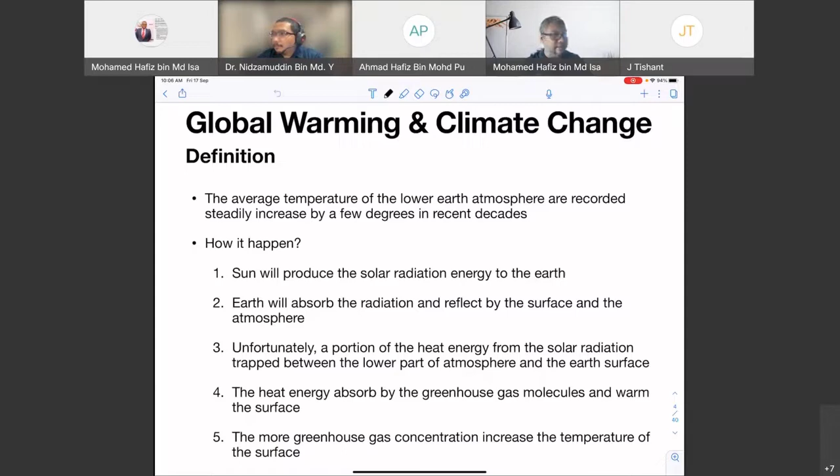So in order to reduce the Earth's average temperature, we need to reduce the greenhouse gas concentration. So what are the impacts if we have a steady increase of average temperature, or global warming?

There are many impacts that we can divide into a few sectors. For example, our health - there are many infectious diseases, poor air quality, respiratory illness. Agriculture yields have already changed, where we need to change our irrigation demand. Our forest composition is deteriorating, and we have a short supply of water resources. For example, some parts of the Earth are having drought, and some parts are being heavily flooded. We have coastal erosion, coral bleaching, and so on. These are the impacts of global warming and climate change.

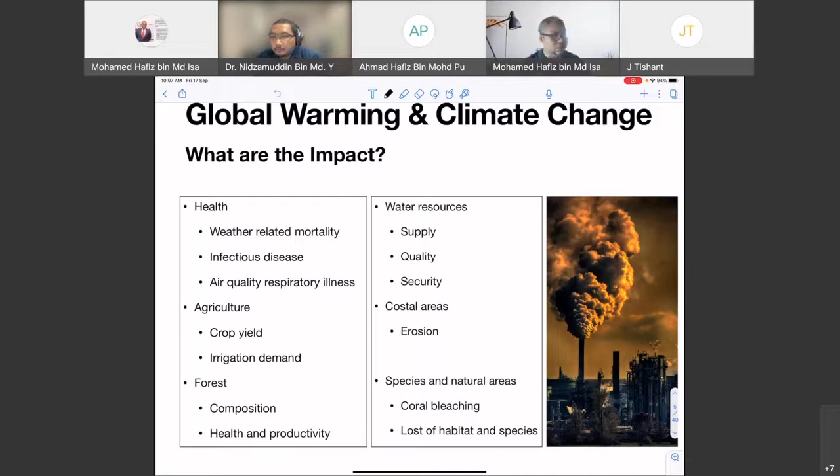So we have to reduce the impact. As just mentioned, the cause of global warming and climate change is due to the concentration of greenhouse gases. So what are the greenhouse gases? These are several gases categorized as greenhouse gases: carbon dioxide, methane, nitrous oxide, fluorinated gas, and other gases.

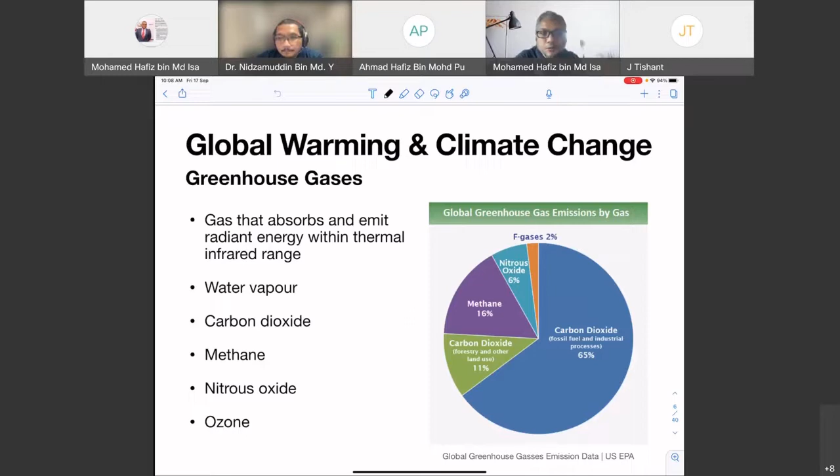So the majority of the gas is carbon dioxide, which is generated from fossil fuel combustion and industrial processes. In order to generate electricity, we need to consume fossil fuel, which generates carbon dioxide. So which sector produces the greenhouse gases?

We have the electricity and heat generation sector, and then industrial processes or manufacturing, construction, transportation, agriculture, and land use change and forestry. As we can see here, the biggest percentage of greenhouse gas production is coming from electricity and heat production, followed by agriculture, forestry, and other land use.

What does this percentage mean? Previously, we had forest, so when we want to do agriculture, we have to do land clearing and so on - that's why we have land use and change of land use. And then finally, we have industry, buildings, and transportation. So where we're going to do the energy management, of course, is in the industry and the buildings.

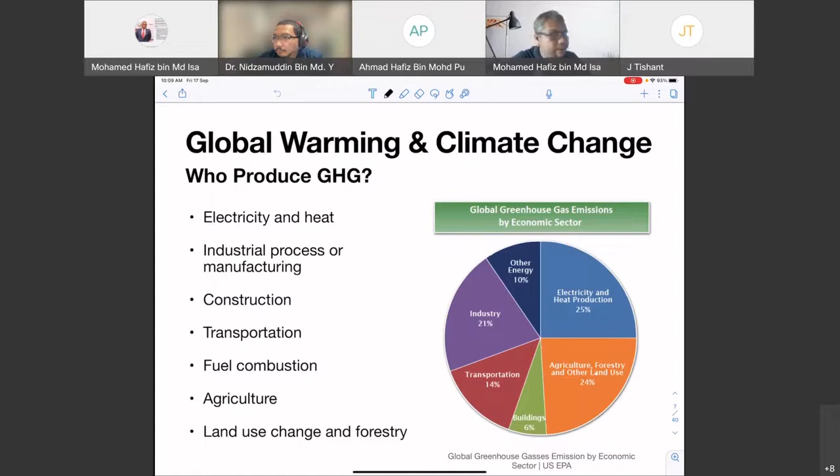Now we look at our country, Malaysia - also a similar trend. From 1980 until 2017, we have steadily increased the amount of fossil fuel, or the fuel source that generates electricity.

So we have the natural gas, petroleum product, coal, biodiesel, and electricity. If we are not doing something, we might have more fossil fuel being combusted, and therefore more greenhouse gases produced from our process.

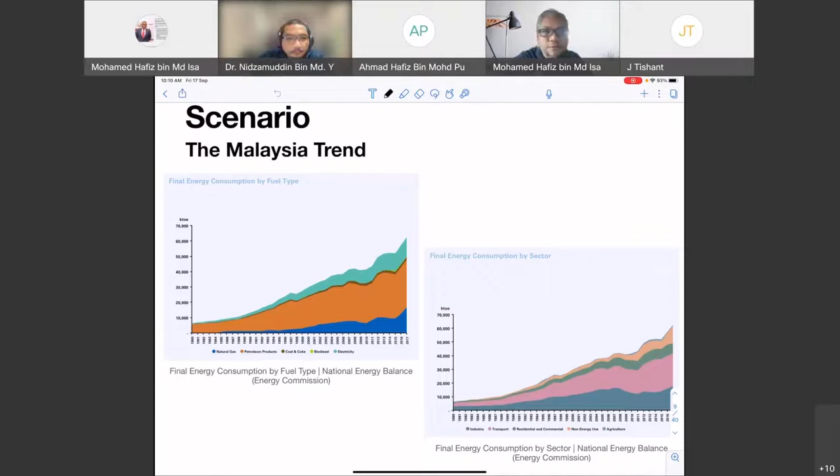So in doing so, we have a global target which is set by United Nations under the Sustainable Development Goals. There might be other objectives addressed by the United Nations to reduce the effect of energy use on greenhouse gases, but I will only focus on goal number 7, which says to ensure access to affordable, reliable, sustainable, and modern energy for all.

What are the issues? More than 1 billion people located in rural areas still live without the benefits of electricity, so we have to balance between generation and consumption. And about 3 billion people still lack access to clean and safe cooking fuels and technology. Without clean and safe fuel technology, of course it will result in malnutrition and so on.

However, while renewable energy power is rapidly increasing, comparable progress has not been seen in transportation and heating. We have seen many renewable power sources being used at the moment, for example solar photovoltaic, solar thermal, biomass, and so on. But this is not being seen in transportation, except for electric cars, and the heating process.

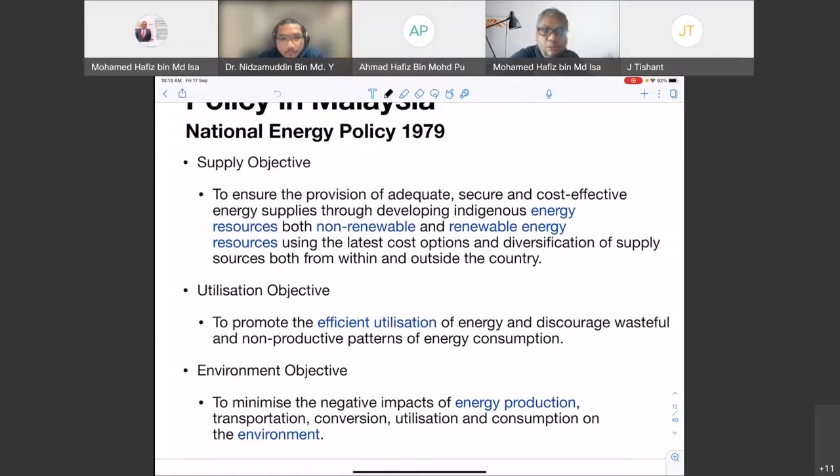So we focus on the second objective, the utilization objective, where we have to use energy efficiently. So we have the global policy and the national policy, which is the utilization objective. And then we have the green technology policy, which sets criteria for what green technology is.

The criteria are to minimize degradation to the environment, have zero or low greenhouse gas emissions, be safe for use and promote healthy and improved environment for all forms of life, conserve the use of energy and natural resources, and promote the use of renewable resources.

So the energy management system consists of this, because green technology is not only focused on the product and equipment, but also the system, and therefore the energy management system is categorized as a green technology.

Apart from our policy, we have a commitment we have to comply with: to reduce our greenhouse gas intensity compared to our GDP by 45% in 2030, with a baseline based on 2005, where 35% of this is on an unconditional basis and another 10% is upon receiving funds from developed countries. So we have to reduce our carbon emission intensity by 45% in 2030 compared to our baseline in 2005.

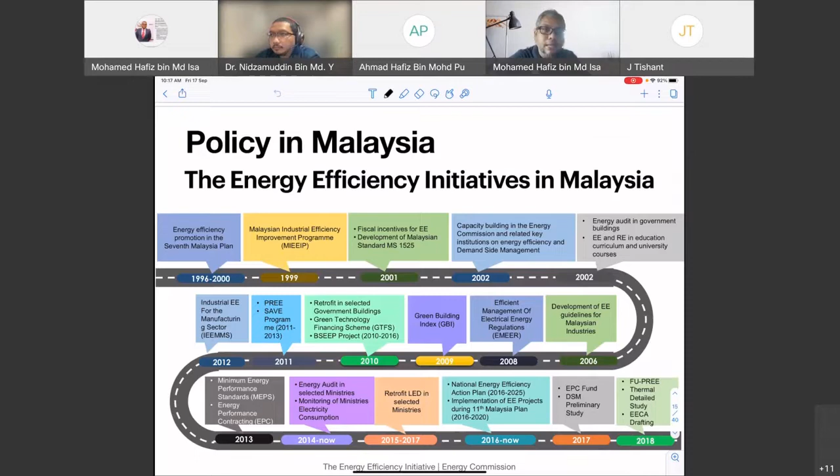Now we look into what is the energy management system or sustainable energy management system. The definition of the sustainable energy management system is a process of managing the energy consumption in the organization to assure that energy is efficiently consumed.

Now the interesting part is the second part, which covers the whole organization. It's not only focused on the equipment and machine, but also the operators who are going to operate the equipment. So the energy management system is not only focused on the equipment, such as when you change to the LED lighting system, or change to energy efficient chillers and so on.

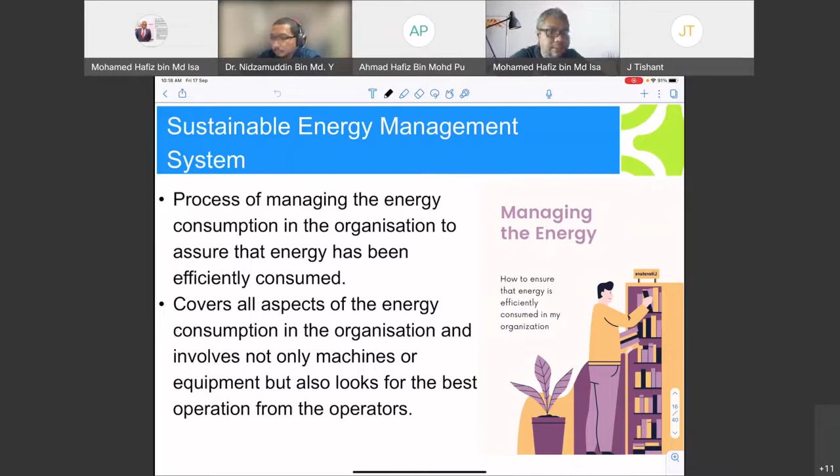It's also focused on how we're going to operate the equipment or the appliances in an efficient way, and what are the methods, what are the procedures that we need to adhere to.

So the objective of the energy management system is to reduce the energy requirement per unit of output. Let's say, for example, before we implement the energy management system, in order to produce 1 unit of product, we consume 100 kilowatt hour. After implementing the energy management system, we hope to reduce from 100 kilowatt hour to maybe 50 or 80 kilowatt hour per unit of product.

So then we convert the energy we consume into a cost. This is where the energy management system not only focuses on the technical part, but also the management part. Because our top management or our bosses do not care how much kilowatt hour we reduce, they only care about dollars and cents. So we have to convert how much energy we reduce into the total cost that we can reduce.

The third objective is to achieve and maintain the optimum energy procurement and utilization. So in doing the energy management system, we will look into what are the energy efficient equipment. In ISO, for example ISO 50001, for the energy management system, it requires the company to look into the design, into the purchasing, into the procurement process of buying efficient electrical appliances or energy consuming appliances. So in the energy management system, we will look into how we're going to use the system to procure energy efficient appliances.

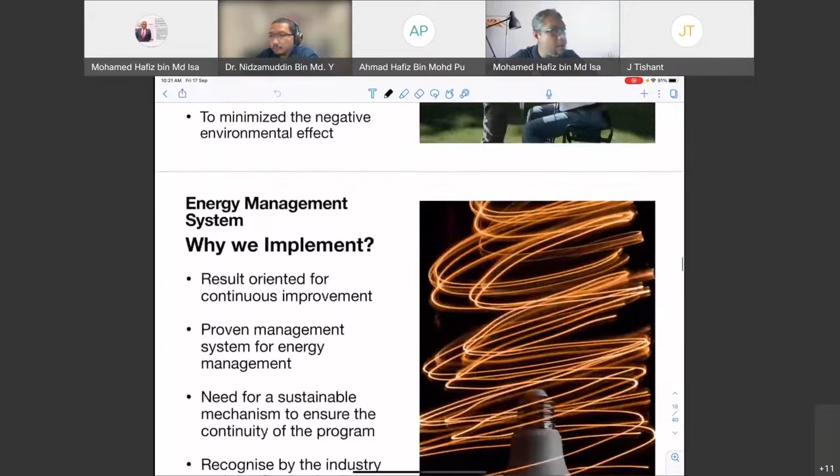And finally, to minimize the negative environmental impact. Because when we reduce the energy, we also reduce the amount of carbon emission that we emit from our plant or operation. So we are going to minimize the negative environmental effect, as the increase of greenhouse gases will lead to global warming and climate change.

And then, why do we need a system? Everybody can do the saving. Everybody can change the lighting system. Everybody can change the chiller system. Everybody can change to efficient motors. But why do we need a system? Because when we do not have a system, it is difficult for us to provide results, and difficult for us to do continuous improvement.

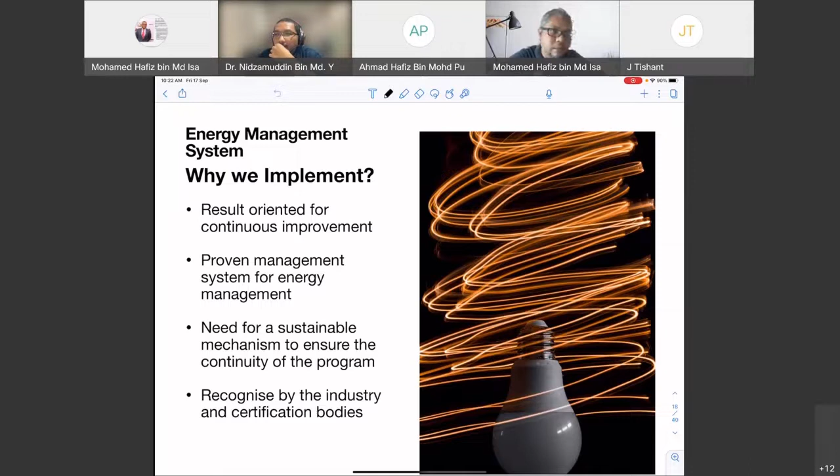So that's why we need a system that's going to guide us so that we have the result we need or target, and we can do continual improvement. Without a system, we cannot prove to our top management how much we save.

If we invest a certain amount of money, this is our return on investment, this is our simple payback period. That's why we need a management system to monitor, target, and plan. Without a system, it's difficult to achieve a sustainable output, so we need a system to have a sustainable energy management initiative. And finally, if we have a system and resources to be certified or recognized by an international body, then we can get a certification.

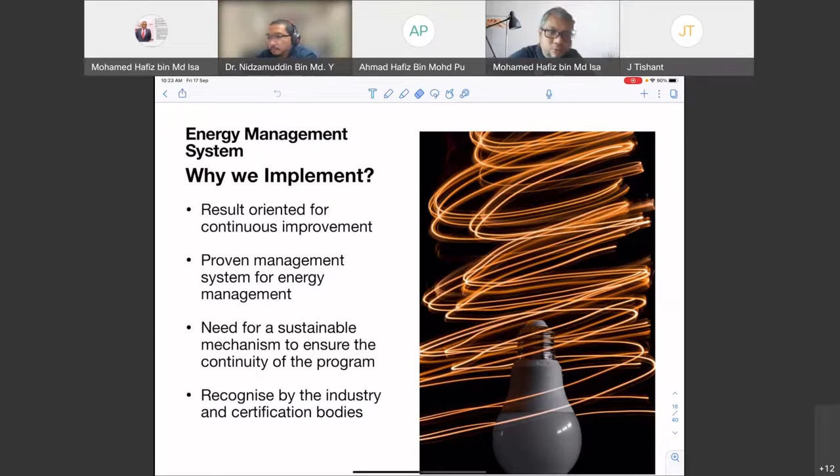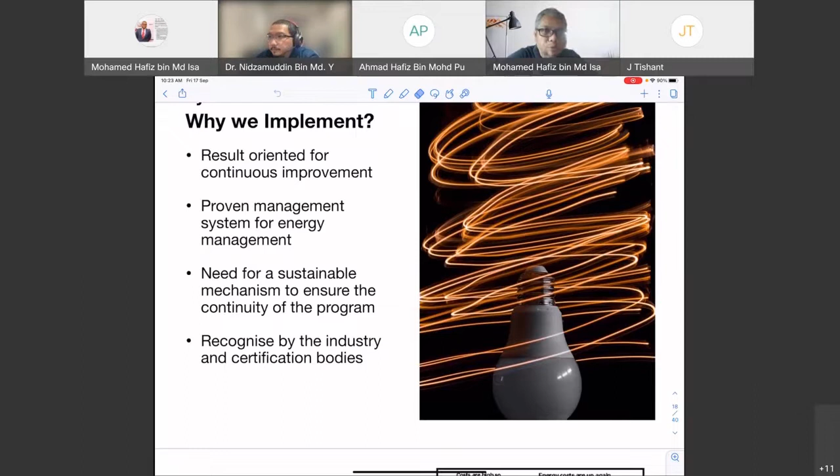In Malaysia, we have two kinds of certification for energy management: one introduced by MGTC under AEMAS, the ASEAN Energy Management Scheme, and the global certification, ISO 50001, which I'm going to explain in a few seconds.

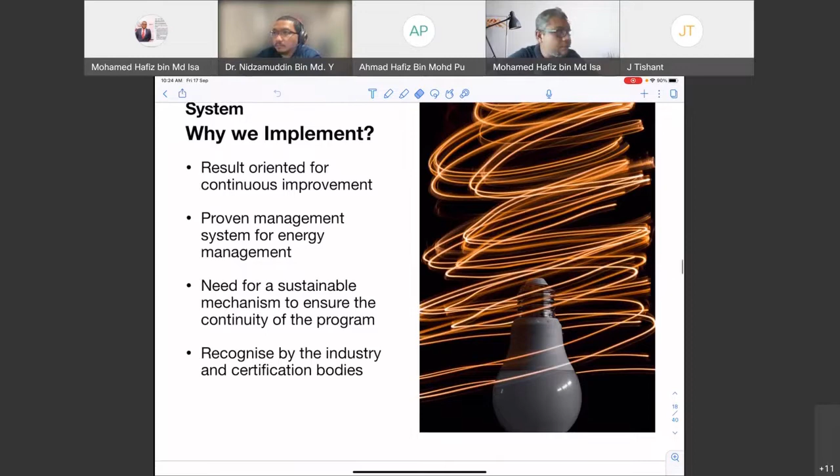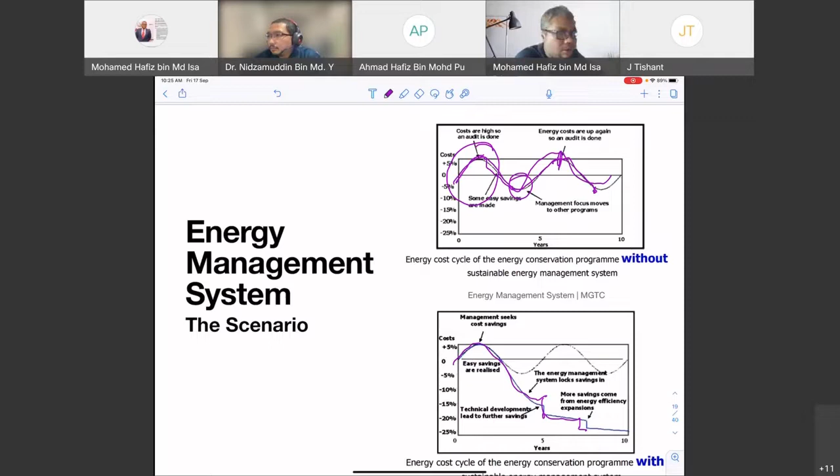However, if we have an energy management system, we start saving and always monitor, monitor. So we can have low, medium, and high investment costs to achieve our target.

So like I mentioned before, we have the ASEAN Energy Management Scheme, introduced by ASEAN and promoted by Malaysia Green Tech. It's called AEMAS, Energy Management Gold Standard, with 3 levels of certification: 1 star, 2 star, and 3 star.

First, the 1 star is where you develop the energy management. The components you must have for this certification are the energy policy committee and the energy management component, and you conduct the awareness training, then you get the 1 star.

For the 2nd star, you have to conduct a detailed energy audit and achieve about 5% savings. Then you get the 2 star energy management gold standard certification.

Finally, for the 3 star energy management gold standard, you have to integrate with other management systems, for example safety and health, environmental management, or product quality management systems. So to have a 3 star, you need to integrate with the existing management system.

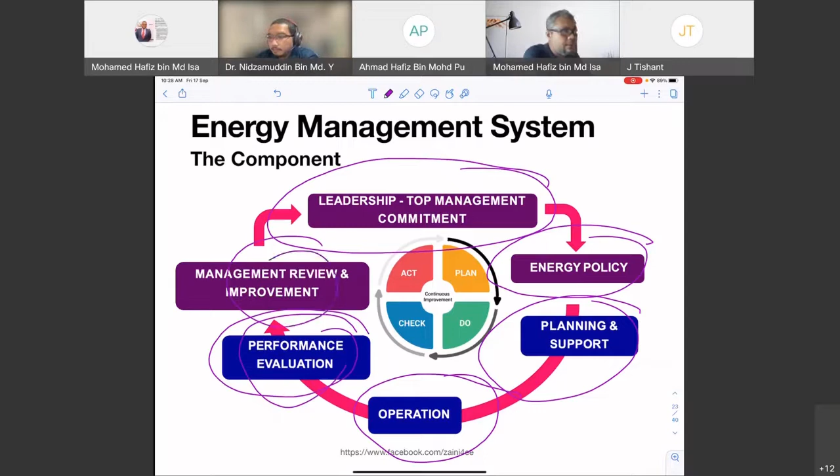First, we have leadership at the top, the top management commitment, translated into the energy policy. Then we have planning: how to set a baseline, what the targets are, what we're going to do. Then we do operation and maintenance of equipment and procedures, and then performance evaluation and management review. So it's a cycle of plan, do, check, and action.

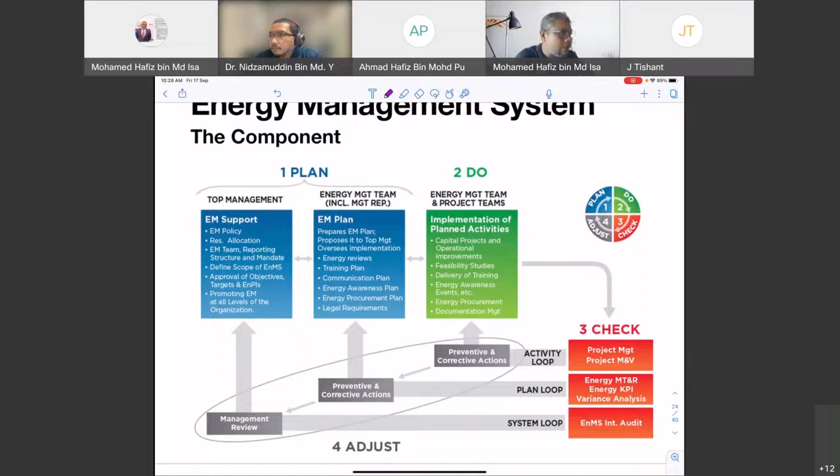So what are the components? Almost the same: we have the energy policy, energy team, energy report, energy target and plan, communication plan, training plan, awareness, legal requirement, procurement, and training—resources to support the implementation of the energy management system. Basically, the two systems are the same.

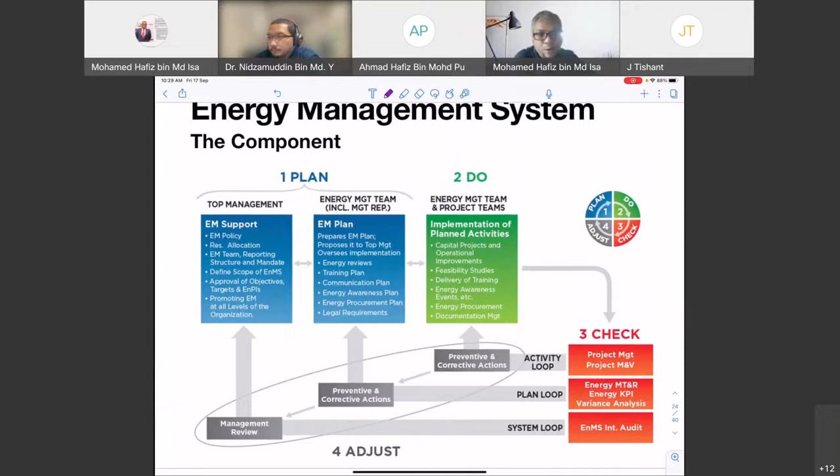However, the ASEAN Energy Management Scheme is recognized only for ASEAN countries, but ISO 50001 is globally recognized. But for ISO 50001, there is no 1 star, 2 star, or 3 star. It's just that you have a certification or not.

Right? But we need to do the system. We need to do the management. We need to do the energy management systematically. So we have a system. All right, so what are the success factors of doing the energy management system?

First of all, in any energy management or management system, we need to have commitment from our top management. Without their blessing, without their commitment, it is almost difficult for us to implement the energy management or any management system. So we must have a top to bottom hierarchy, a top to bottom management approach. It will be translated into the energy policy, and the policy is distributed to all the users inside the organization. So first, we have the top management commitment.

And then the second one, we need a competent energy manager. We need people who know in depth how to manage the energy, who have technical knowledge. Not only technical knowledge, we need people who have management skill to manage the energy. As I mentioned before, energy management does not only involve a technical part, it also involves management. So you must possess a management skill.

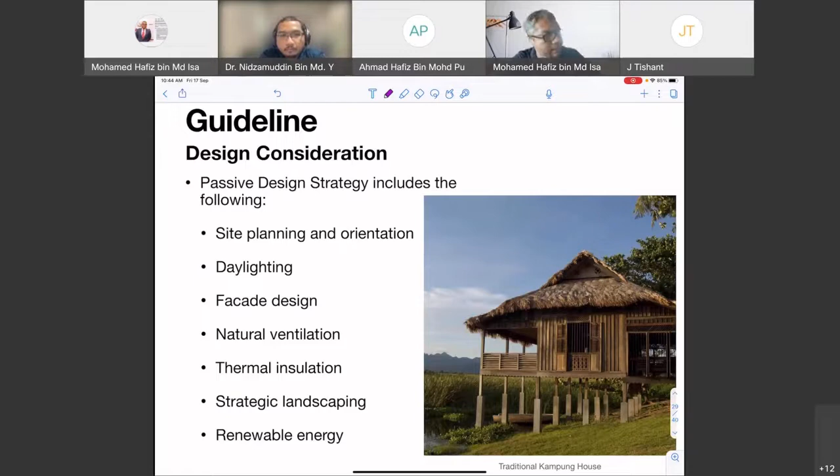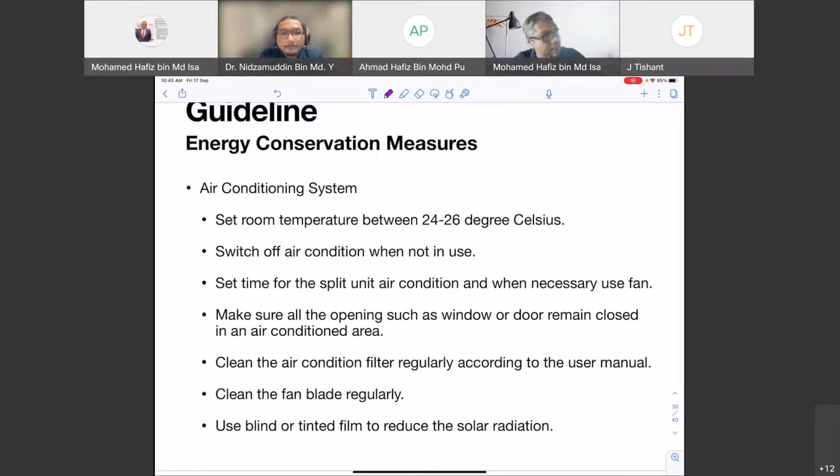And then do some maintenance for your air conditioning system. For example, clean your filters, and for your fan, clean the blades regularly. So these are the energy conservation measures. Some of these measures don't need any cost.

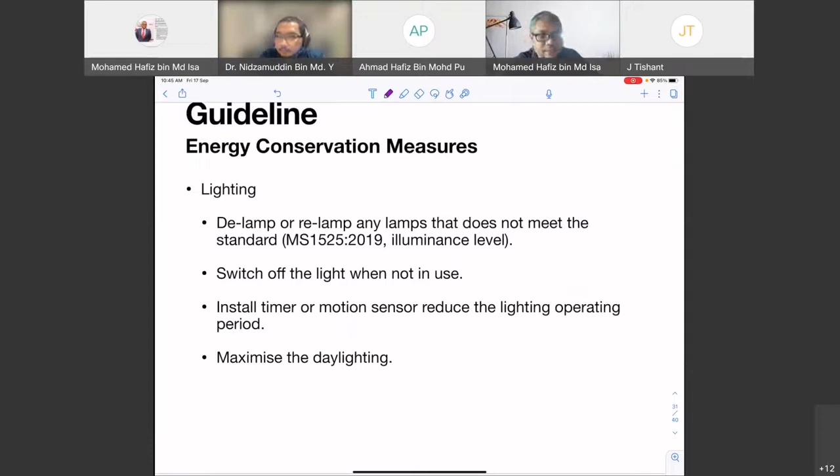This will need some investment cost, and maximize the daylighting. For office equipment, nowadays we have printers with an eco mode. You can set your printer, scanner machine, or computer to use an eco mode.

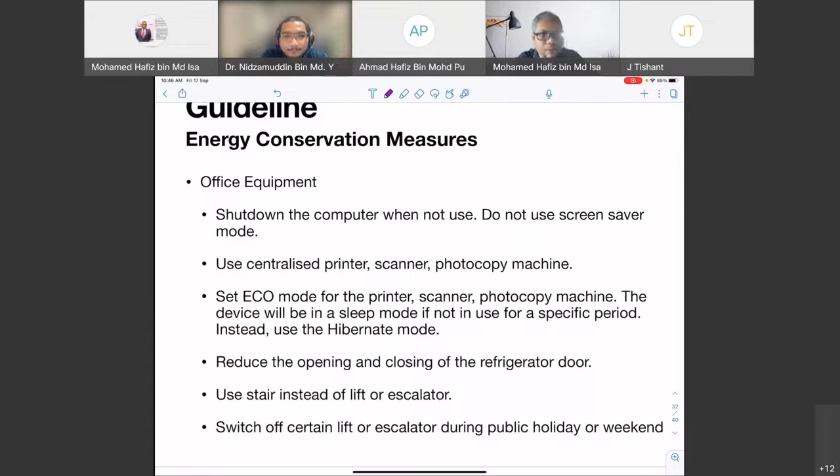And of course, a healthy lifestyle - use the stairs instead of the lift or escalators. Switch off the lift and escalators during public holidays or weekends. This is for government offices or commercial offices and so on, but not for shopping malls, because everybody goes to the shopping mall during weekends or public holidays. If you switch off the lift or escalator there, people might go mad at you, right?

And then we have some efficiency measures. Of course, you replace non-efficient aircon with efficient inverter ones. Use high efficiency motors. Replace or retrofit your lighting system using LED. And for office equipment, you might consider buying energy efficient electrical appliances.

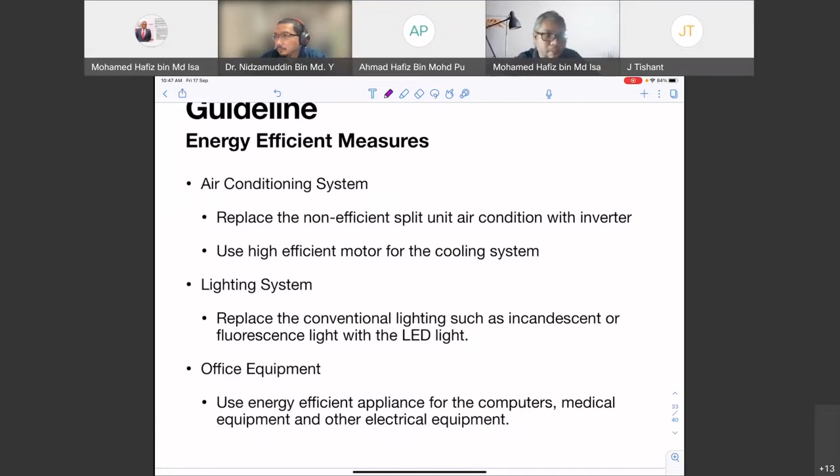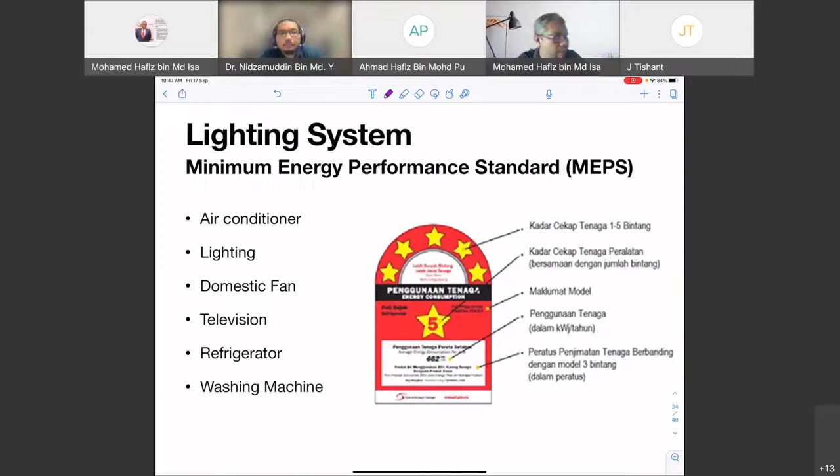For example, you buy a new TV that has a 5-star rating. In our market, we have this star certification for electrical appliances, called MEPS, minimum energy performance standards. There are 6 items: air conditioning system, lighting, domestic fan, TV, refrigerator, and washing machine. For these 6 items, you can look at their star rating when you want to change your old appliances and so on.

And then for the procurement process, you can look into the government green procurement, now we have GGP 3.0. You can also look into the MyHijau directory at the Green Tech website. They have a lot of equipment, products, and systems with MyHijau certification, which I would say are energy efficient equipment. So when you want new equipment, you can look into these MyHijau certified products.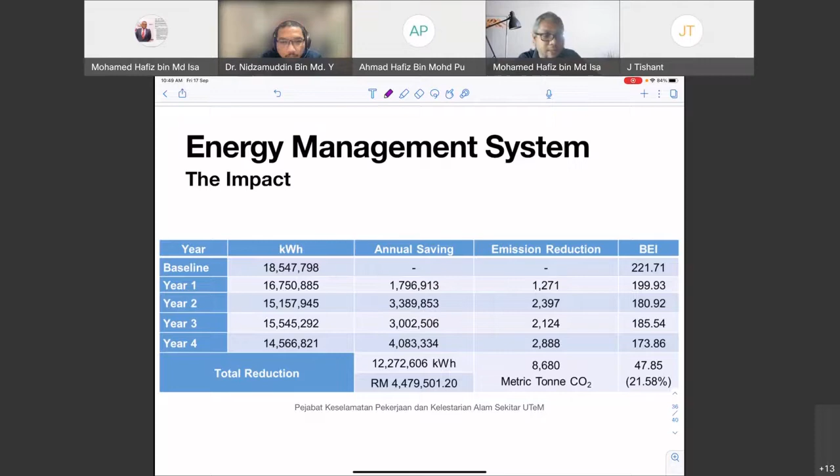And joy - this is good if we have a certification. So UTeM, I'm proud of it, we have a 1-star certification. We got this certification in 2016. And for 2-star, we have the certification in 2019. So at the moment we have 1-star and 2-star energy management gold standard certification.

And currently we are already being audited for 3-star EMGS gold standard. So inshallah, in 1 or 2 months we will be able to get the 3-star energy management gold standard.

So recently we were awarded by the National Energy Award as the winner of energy management in large building, and then we have the special award for the Institutes of Higher Learning for the implementation of energy management. And we represented Malaysia in ASEAN, and Alhamdulillah, we are the winner of the large building for building and industry category for energy management.

Okay, so these are the achievements, these are the recognitions we as UTeM should be proud of. And I think that's all. Thank you very much for listening. I hand back to our moderator, Dr. Nizam.